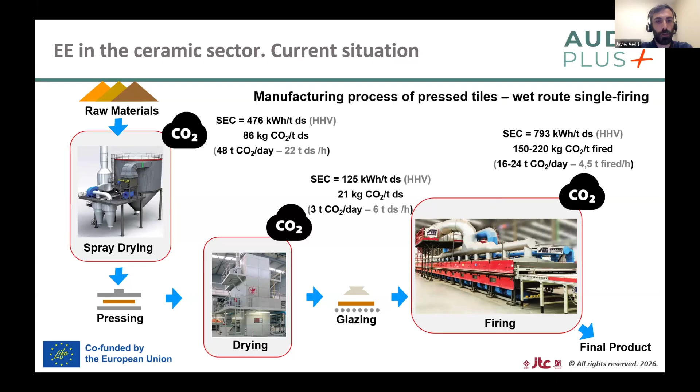The specific energy consumption for the spray drying is 476 kilowatt hours per ton of dry solid. In drying, the specific energy consumption is 125 kilowatt hours per ton of dry solid, and in firing it is a little bit higher: 793 kilowatt hours per ton of dry solid. So the main energy efficiency actions are going to focus on these 3 equipment.

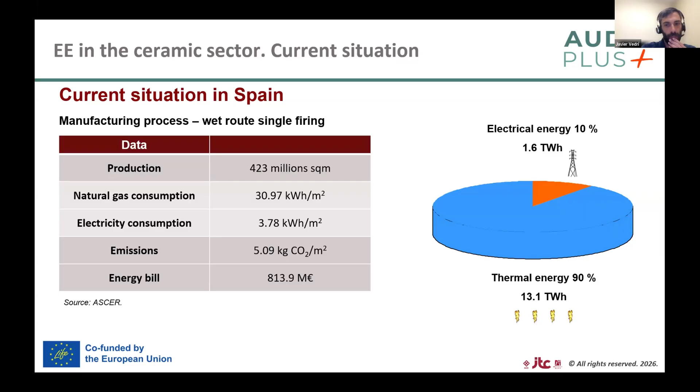And once we have seen a little bit the current situation of the main numbers of the sector, second topic that I would like to cover is the analysis of the installation. And that's because if we want to apply energy efficiency measures, first of all, we have to know which is the current situation of our factory or of our company. For that, we have to identify the highest energy consuming equipment, and we have to know the consumption of every single equipment in our company, in our production process.

And also we have the option to study or to modify the variables of the ceramic process. Some examples of variables in the ceramic process are, for example, the excess air in the burners, or the solids content in the slip, or the gas composition, or the static pressure inside the kiln. We can modify these variables to achieve a better energy efficiency.

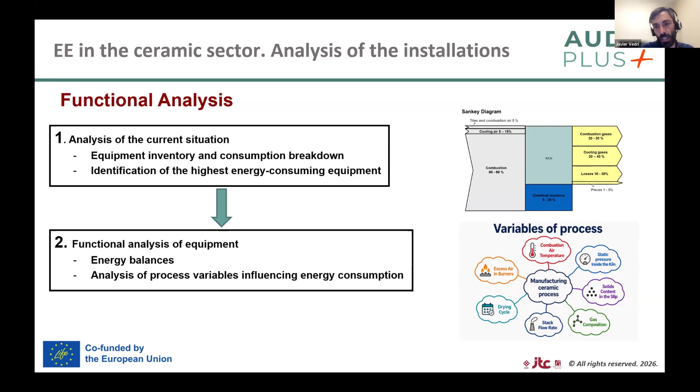So once we know what we have to analyze in our company or in our process to get a better energy efficiency, I'm going to explain which vertical energy efficiency measures we have in our sector, in the ceramic sector. First equipment I would like to bring to your attention is the spray dryer. The spray dryer is basically an equipment that uses hot gases to dry ceramic liquid known as slip. These hot gases dry the slip, and we get a dry powder. This dry powder is ready for the next part of the process, which is the pressing.

So in this spray dryer, the main energy efficiency measures that we can apply is the use of gases from a cogeneration turbine as drying gases, or the use of gases from a kiln cooling stack as drying gases. So this way we can reduce the natural gas consumption in this equipment. We can also implement an automatic control in this equipment, or we can optimize some process variables such as the drying gas temperature or the slip temperature. We can also increase the solids content in the slip to reduce the energy consumption.

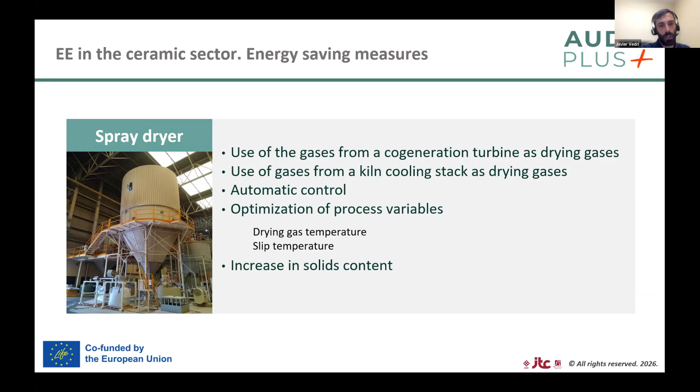Next equipment is the tile dryer. Once the ceramic tile is formed, we need to reduce the humidity or the water in the tiles before going to the kiln, and this is the equipment that we use to reduce this humidity in the tiles. The main vertical energy efficiency measures that we can apply to this equipment is the use of residual heat from other processes, mainly the kiln, to use these hot gases in this tile dryer.

We can also optimize some process variables such as the stack and the drying gas flow rates. We can also work on the heat distribution to avoid temperature gradients. And we can also work on the drying cycle, modifying the temperature and the humidity profile in a controlled way, because we don't want to modify other properties of the process, but we can work on these variables to achieve a better energy efficiency.

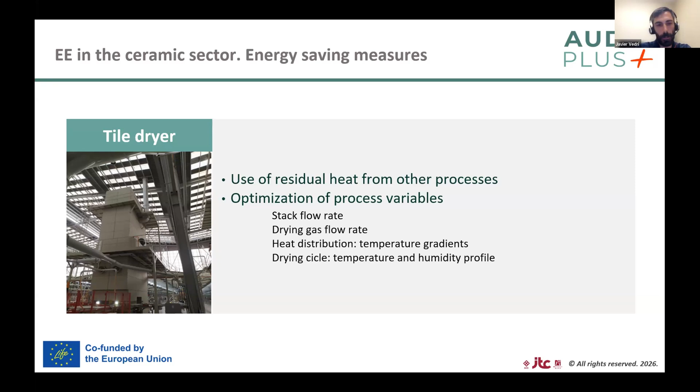Last equipment is the kiln. The kiln is the last part of the ceramic process. In this equipment, the final properties of the tile are given.

We can work on the optimization of some process variables of this equipment, such as the static pressure, the gas composition, the air excess in the burners, or we can also preheat the combustion air to reduce the natural gas consumption, or we can work on reduction of heat losses through walls and roof, improving the quality of the materials used for the insulation of the kiln. Or we can also use some residual hot gases of the kiln. We can use these gases in a pre-kiln dryer, which would also reduce the natural gas consumption.

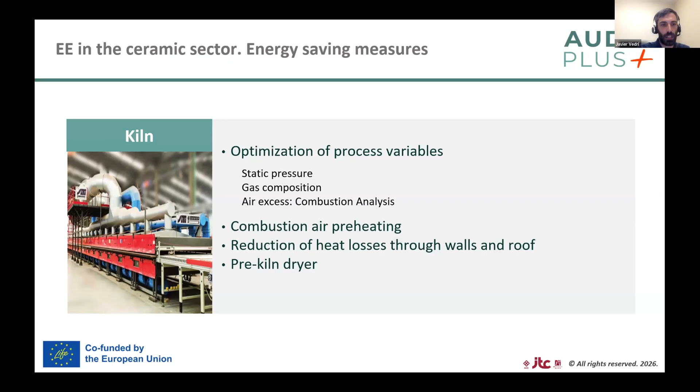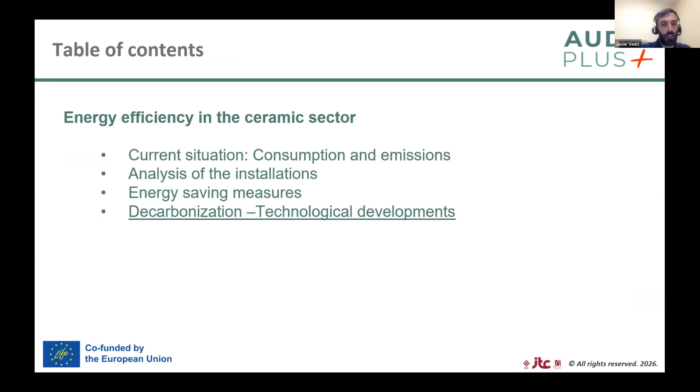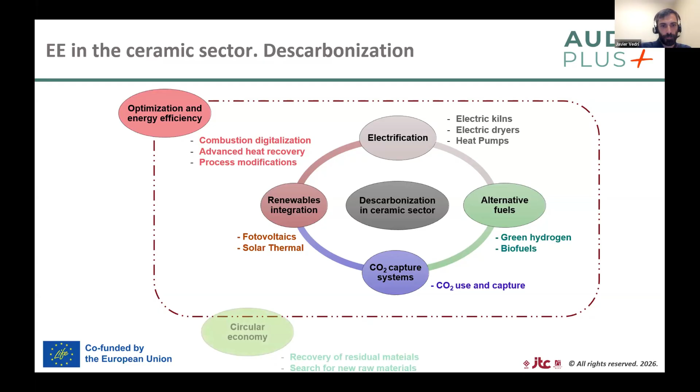We have options such as electrification, the use of alternative fuels like green hydrogen or biofuels. We can also capture the CO2 that is emitted to the atmosphere. And we can also integrate some renewables, such as photovoltaics or solar thermal. These are some of the decarbonization technologies that we have spoken about in the previous slide. We can electrify some drying processes, or even the kiln, the firing process.

But for decarbonization, obviously, this heat or this electricity has to come from a renewable source. We can also store heat from renewable sources and use it in the process. And we can also use some alternative fuels like biomass or hydrogen, because, for example, the use of hydrogen reduces the CO2 emissions. If we use 100% hydrogen, for example, replacing the natural gas, we could reduce our CO2 emissions 100%. But we still have to develop these technologies a little bit to make them feasible for the ceramic sector.

Another option of decarbonization is heat pumps, which improve the temperature of a residual heat source. We can increase this temperature to reuse it again in the process. And this measure also increases the energy efficiency.

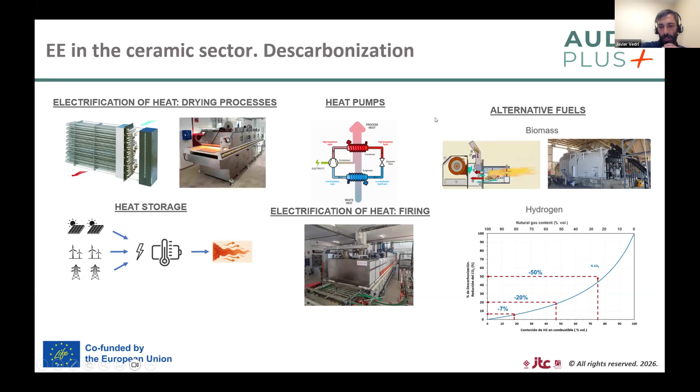All these technologies can be found in a guide that we have developed and published, and it can be found on our webpage. Here you have the link to download this guide. This is free, so you can access our webpage and download this guide. You will find information about these technologies and also energy efficiency measures applicable to the ceramic sector. I forgot to mention that this guide is in Spanish, but it also has an executive summary in English. So yeah, you can check it on our webpage.

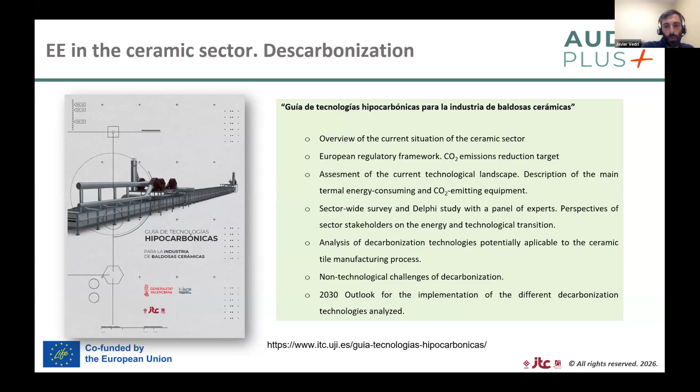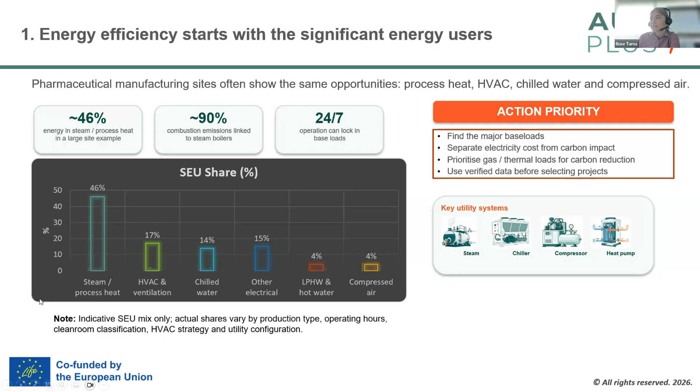The next step is to optimize existing utility systems before investing in major capital projects. In pharma sites, we often see the opportunities in HVAC, AHU units, steam, compressed air, and chilled water systems. Many improvements can come from relatively simple actions such as better HVAC and AHU schedules, set point schedules, compressed air leak reduction, and system controls. So the key message is optimize first, then electrify the remaining demand. This helps avoid oversizing future equipment.

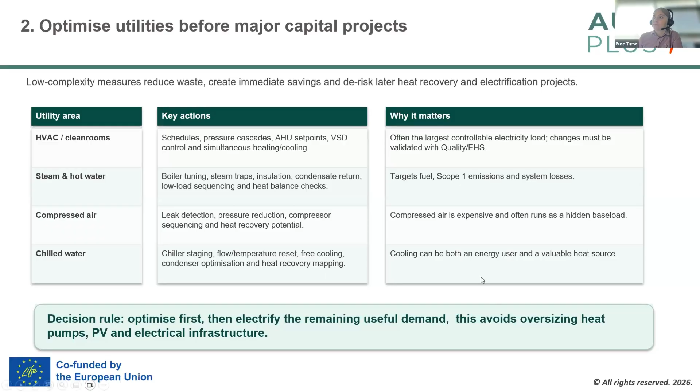Okay. Oops, sorry. We start with the current carbon footprint that you see here. This is only an example from our audit report results. Then first reduce the unnecessary demand through controls and set points, followed by reducing steam and air losses. After that, we recover available waste heat and electrify the remaining useful heat demand. Finally, renewable electricity is sized against the already optimized load. For example, solar PV panels, if possible wind turbines, something like that.

The key point is that every step reduces the size of the next projects. For example, our current thermal carbon footprint is 100%. It goes from 100% to 92%, 92% to 85%, and the final load is 25% based on this carbon footprint.

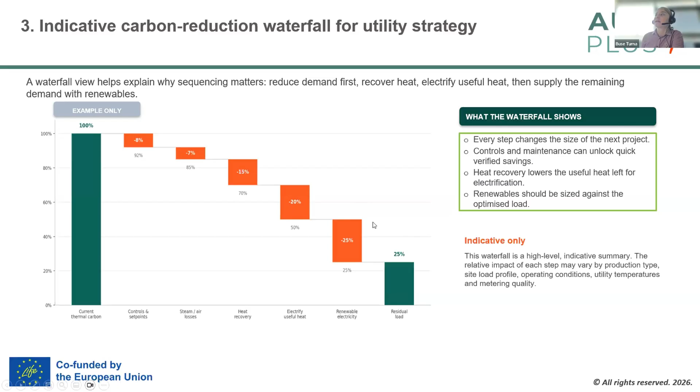When we think about heat recovery in pharma, water-to-water heat pumps often come to mind first, because these sites frequently have simultaneous heating and cooling demands. Waste heat from the chillers or other utility systems can be upgraded and reused for low pressure hot water, CIP hot water, or AHU coils. The key is to match the right heat source with the right heat sink and check that the loads occur at the same time. You can see here the basic process for heat recovery.

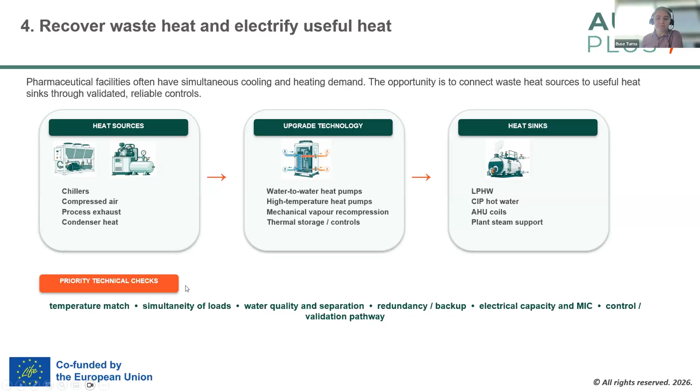The priority is to start with the low-cost and no-cost measures first, such as compressed air leaks, AHU schedules, and steam traps. Then we move to CAPEX energy efficiency projects, followed by electrification of heat, such as heat pumps, and finally renewables like solar PV. The key point is to optimize demand first, then decarbonize the remaining load.

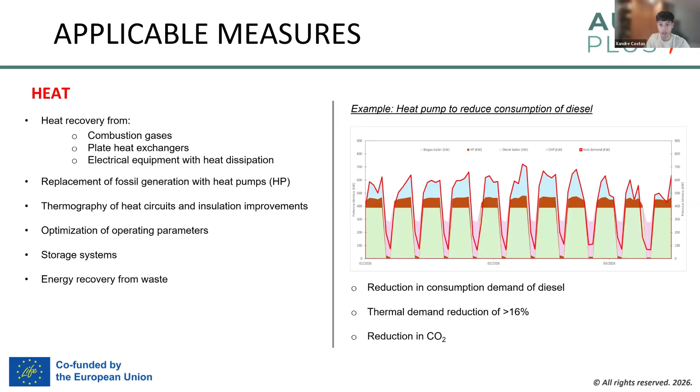On the right, I put an example. This is an example of a big food industry that had a biogas generator, and the rest of the heat demand was supplied with diesel. If you integrate a heat pump to the heat mix, you could reduce the thermal demand by about 16%, and by reducing the use of diesel, you reduce about 5 tons of CO2 emitted.

Another similar measure applies to the cooling lines. This is also about replacement. The measures are the replacement of conventional cooling plants with reversible heat pumps that could also give you hot and cold energy. Also the thermography of heat circuits and insulation improvements, the programming and optimization of operating parameters, and this is more difficult, but you could also implement storage systems.

On the right, you see a very visual example. This was a detection of losses in a cooling system that crosses with a hot pipe. At the bottom you see a hot pipe, and in the middle the cold system. You see that in 20 centimeters, there's a line that is 0 degrees, and another line that is nearly 50 degrees. So if you implement insulation improvements, you could reduce the operating set points, have lower cooling demand, and significant savings with a low implementation cost.

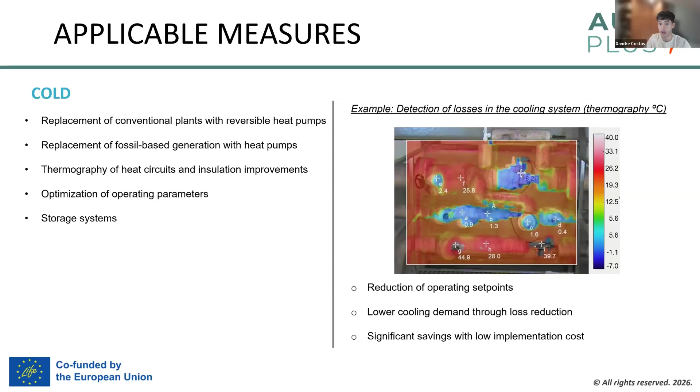That is very important in this part. And lastly, you could also do some electrical measures.

I'm going to divide this into two parts: the active measures and the passive measures. The active measures, as Javier mentioned before, include replacement with high efficiency motors, because when we go to some industries, we see that if that motor works, they don't touch it. But it's really important to replace this equipment, because they have a lot of hours of work, and the payback is very positive.

You could also install frequency drives, and optimize the compressed air systems. Another active measure would be installing renewable generation, like photovoltaic, or installing capacitor banks to reduce the reactive power.

On the right, there's another example, of a sector that has a lot of grinders. Before the project, the sector started the grinders when they started to work at 8 o'clock. So if you program that start differently - they also had a photovoltaic plant - what we do is schedule the gradual startups to fit the solar photovoltaic production to the demand.

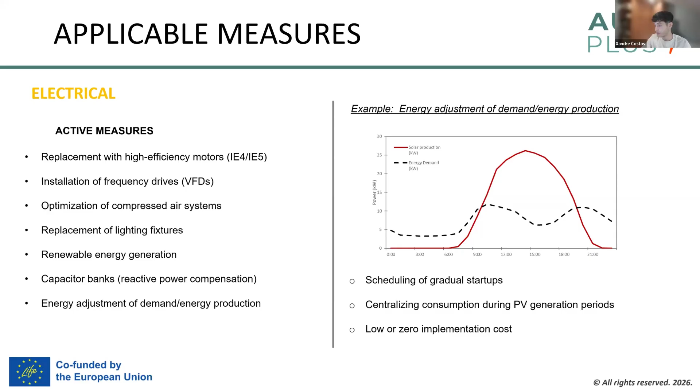So by just a little adjustment, they could significantly reduce the external energy consumption. And another part, not as important normally for the industry, but for me it's the most important, are the passive measures. Because if you have good passive measures, you get a lot of very important information from that plant. For example, these passive measures are energy monitoring and digitalization, automation and control of energy processes, and scheduling and energy tracking of performance indicators.

This was, for example, an energy baseline from an industry that had the actual consumption and demand of energy. From the energy baseline, they could identify the energy behavior patterns. They could do consumption forecasting, and they had energy performance indicators that enabled preventive maintenance.

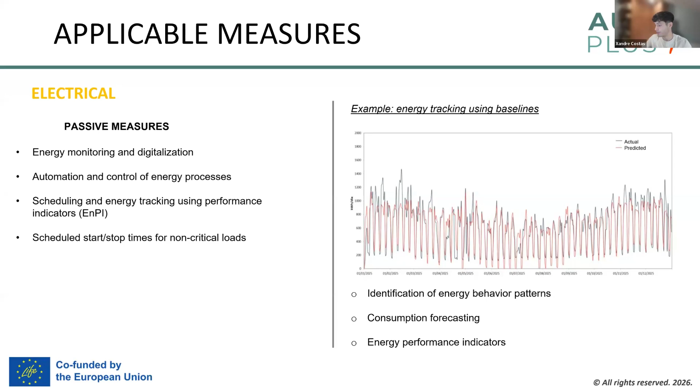And finally, in the first part of my presentation, I talked about the difference between continuous and seasonal industry. The main difference is that in continuous industry, there is high annual utilization. They work all year, and when you're talking about replacing equipment and its payback, that's a good indication to justify that investment. In the seasonal industry, this is a very difficult part.

Another point is that the energy charge dominates the cost structure over the power charge in continuous industry, while in seasonal industry it's usually the opposite - the power charge weighs disproportionately compared to the energy charge. Finally, the load curve shows moderate daily and weekly variability, but no marked seasonal discontinuity.

This means that every year the continuous industry is very stable and very linear, but in the seasonal campaign it's the opposite. To close this presentation, I want to remark that the capex of efficiency equipment pays back in parallel with its relevant service life, but when it operates only some weeks per year, this becomes very difficult.

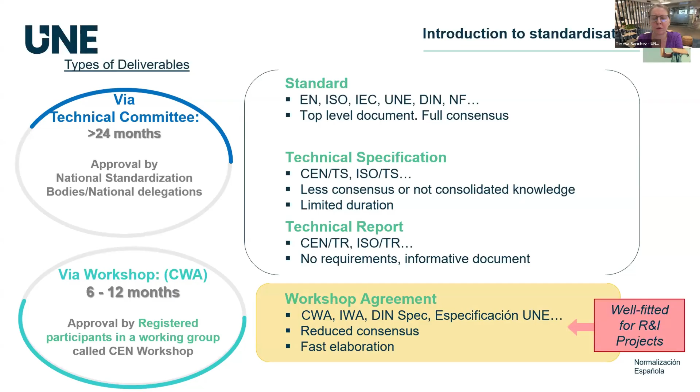So a little more detail on what is a CEN workshop agreement. The CEN workshop agreements are workshop agreements developed at European level in the framework of CEN, the European Committee for Standardization, and they are standards with a lower level of consensus because it's not the countries who vote, but international experts. But they are standardization documents and are included in the catalog of CEN, the European Committee for Standardization.

And you finally have a standard like this example I put here.

What kind of content can you include in such a CWA standard? You can include many types of content, like terminology, a methodology, or a set of KPIs or test methods, etc.

You have to bear in mind that the information you put in this standard will be public, so you cannot include confidential information. And also, as this is going to be a standard, the information should be reusable and replicable by other organizations outside the project. It cannot be like a project deliverable only fitted for the project. It had to be something more general and more reusable. And you can think also that it can be reusable in other sectors, different from the one you are dealing with in the project.

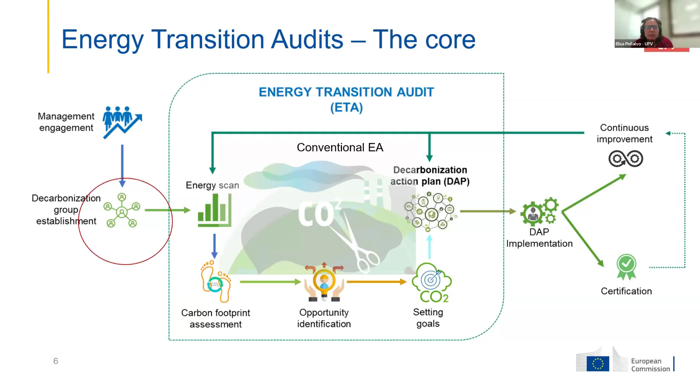With all that, we create this decarbonization action plan, and we move to the certification so the company can receive a benefit associated, like our previous colleague was explaining, to the white certificates or any other certification that might be available. So the main focus of our project, besides developing this new methodology, was to make sure that all the different actors were involved in the preparation of this decarbonization plan.

So we included the energy auditors, the management, and the energy managers, in-house and out-house. For example, if you have an external energy auditor collaborating with management in order to make sure they decide what will be more strategic for them, but also the energy manager in-house to make sure this can be implemented.

So far, we have standardized an inventory of 327 kilotons of CO2 as a baseline in the 20 sites. We identified and worked with heavy industries in order to test and validate this methodology, and we based the preparation of the decarbonization plan on the different scopes and also on the cost-benefit analysis, in order to define at the end a roadmap according to the funding possibilities.

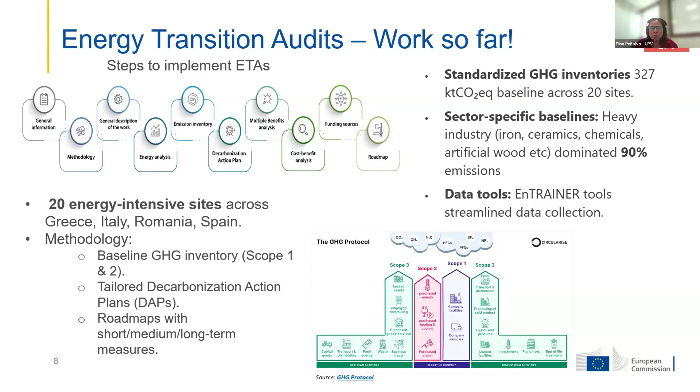We have here the main results that we achieve in terms of the primary energy savings, final energy, renewable integration that we propose, the reduction of greenhouse emissions, and the investments that the different companies, those 20 companies, will have to invest in order to achieve these savings.

The main feeling around the different sectors is that the energy transition audits were very interesting. There was a lot of interest from the different companies when we explained the new concept, especially because they were really interested in the last part, in order to include a decarbonization roadmap that will allow them to have a specific pathway to achieve a specific target, such as 60% reduction by 2030 or 50%, since they have to comply with many different European regulations or recommendations, such as Fit for 55 or REPowerEU.

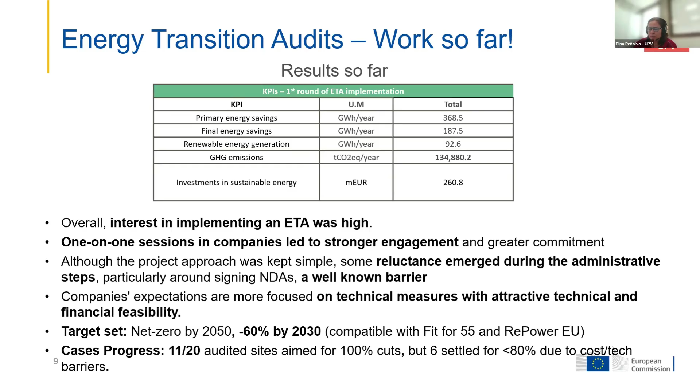So here I have an example, but it's very similar in terms of the energy efficiency measures that we propose, like our colleagues mentioned before. So I'm not going to go in detail, I'm just going to highlight what has been different from the typical energy audit.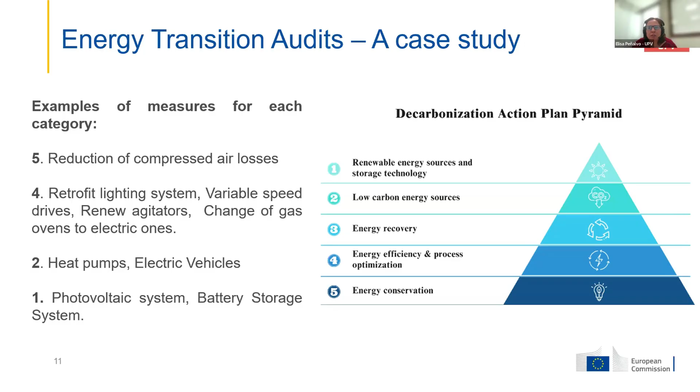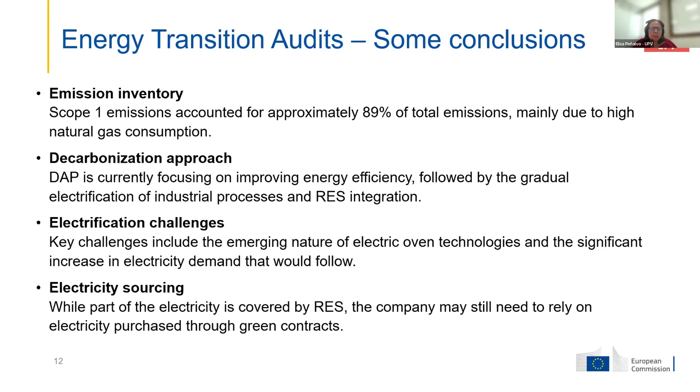Some conclusions: we have created the emission inventory as well, and we have identified 89% of total emissions, mainly due to natural gas, as it was expected and mentioned here during this webinar. We have approached with a lot of interest the decarbonization action plan, the electrification challenges that we're going to encounter in the future, since we are electrifying more and more, what the demand will be. And this is something that is still under study, how we are going to respond to these electrification challenges introducing the renewable energy sources.

From the technical challenges we have, associated with what I just mentioned, the installation of photovoltaic creates grid bottlenecks among other problems within the grid. It is true that it's recommended to include storage with the photovoltaic, but in terms of the investment, the financial indicators are less convenient or less promising.

So we have come to the conclusion that the fuel switching from natural gas, for example, or electrification doesn't have a clear policy or regulative environment. So it's kind of difficult trying to bring all the pieces together. So we understand that the local regulation, especially with the PV installation in different parts of the countries that we have worked on, is something that needs to be further studied.

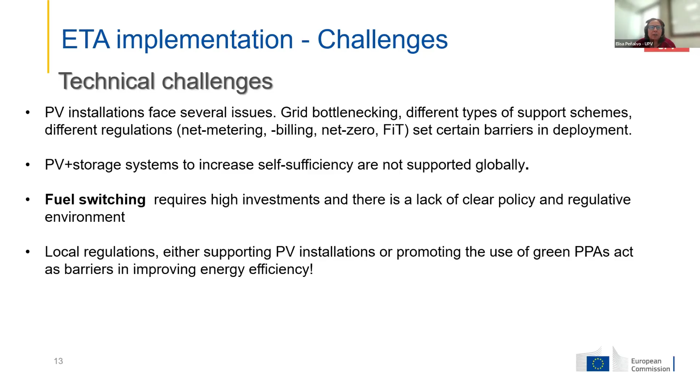Another thing associated with the project was the non-energy benefits, and we have identified several barriers, such as, like I mentioned, the lack of standardized methodologies or the difficulty collecting accurate data, because you need to relate, for example, time reduced in the manufacturing process, or the benefits for the people working on a specific manufacturing line, to the energy reduction. So you need to make sure that you carefully understand both processes in order to make the relation among them.

And regarding the cultural barriers, we have also identified that the companies often view energy savings as technical and cost saving, but not focusing on the long run, like, for example, the decarbonization plan. And I think this is why it was very interesting for them to introduce this new approach. The employees obviously lack awareness and engagement, so this is something that needs to be worked on in order to make sure that all the different parts of the company participate in the development of these activities. And this is where we have identified the resistance to change, etc., in terms of the cultural barriers. So it's very important that you empower people to participate in the process from the beginning.

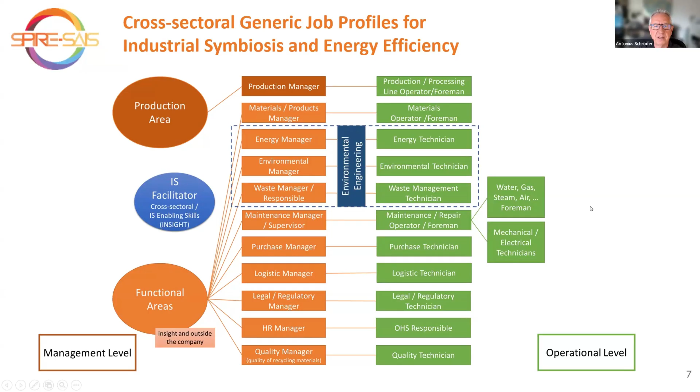And we thought concerning industrial symbiosis that there is a need for an industrial symbiosis facilitator outside the companies who has, let's say, the trust of the different companies and so on. And a training was already developed by the INSIGHT project for this profile.

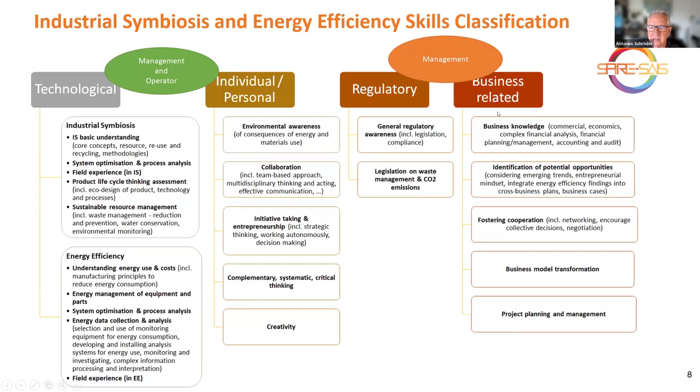Then we looked at what kind of skills are relevant, and you see here for the management and operator level, there are technological skills relevant concerning industrial symbiosis and energy efficiency, but also individual, personal soft skills or transversal skills. So collaboration, entrepreneurship, complementary thinking, and creativity, we found out. Only for management, the main tasks are regulatory and business-related skills listed here in the slide.

But now to our assets we developed in the Skills for EII roadmap concerning the core components of our ecosystem. There is a foresight tool which is called Skills4sight. This is AI based, where we can detect emerging skills trends continuously.

With this, we collected 2,200 relevant skills in our database and more than 500 cross-sectoral and sectoral skills and trainings. The second asset is the Hub 5.0. That's the online training platform, which we see also as a GPS for careers in industrial transition. And I will tell something about it in a later slide.

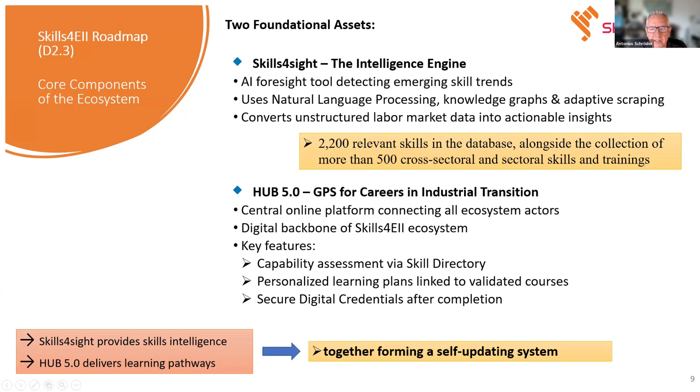With both elements, we aim to form a self-updating system, which is also moving forward after the project funding period. So Hub 5.0, this is a short video showing what we are doing. If you want to have a look to play around with this, you see here already a capability assessment going on, looking for which kind of skills you have and which kind of skills you need.

And then you are directed to occupations like the green steel architect. It's based on learning outcomes, it's very much practical driven, and it's used already a lot. We see this as an ecosystem, which means that this training platform could be used, but also this training platform could be a platform to distribute trainings.

Maybe Elisa, for your project, after the project time, it might be also interesting to integrate it in this infrastructure, because we are not only focusing on one sector, but more and more using this infrastructure for other sectors as well. So associations are there, industry companies, universities, high schools, training providers, but also governments and international organizations, as well as equipment and service providers.